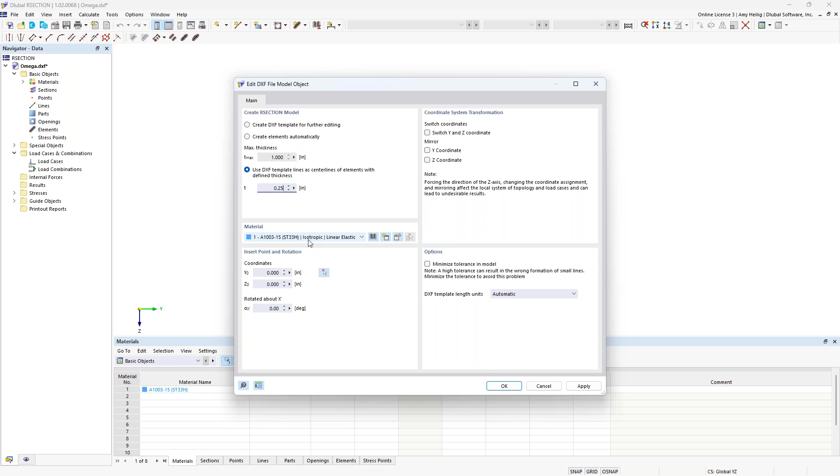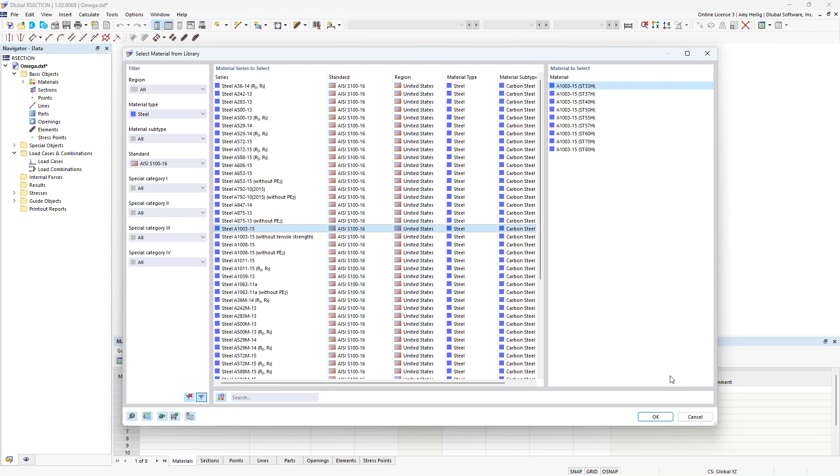We can visit our material library, and over on the left, we have the filters to utilize the steel dropdown and then the AISI S100. So here are all of the available materials for cold-formed steel. And notice that as we click through these different options, there are several subcategories as well. For this particular cross section, we'll go ahead and utilize the A1003-15 and the subcategory here of ST33H. So that material will then be set within this dropdown, and we can go ahead and click OK.

So once the import is done, we actually see everything automatically generated for this custom cross section. Now, I did want to point out that these are completely straight elements. We get a little bit better performance with the finite strip method with cold-formed steel sections when we just model directly these straight elements. It is possible to also model arcs at these corners where the elements join, but just know that the calculation time will be increased because of that. So ideally, it would be best to keep these as straight segments.

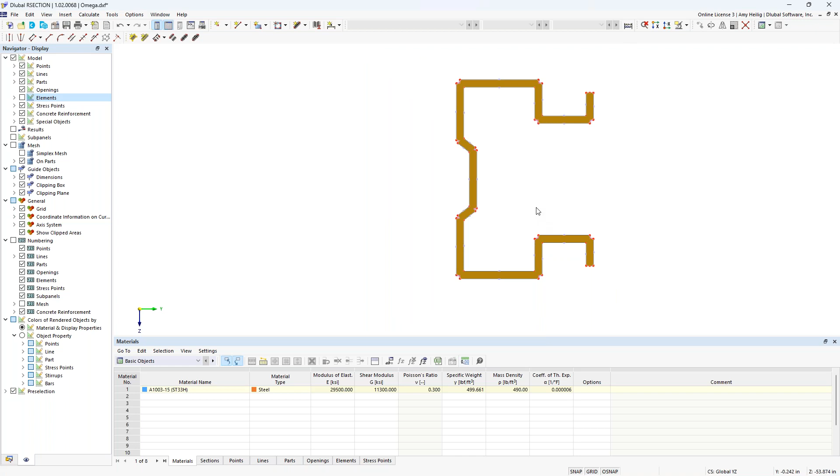Now, looking at the custom cross section here, we have a couple of elements that, again, were automatically generated. We'll start off with what we call the part. And the part is automatically created between the exterior boundary lines here of the cross section. Then on top of that, we have what we call the elements. And each one of these segments here is comprised of an element.

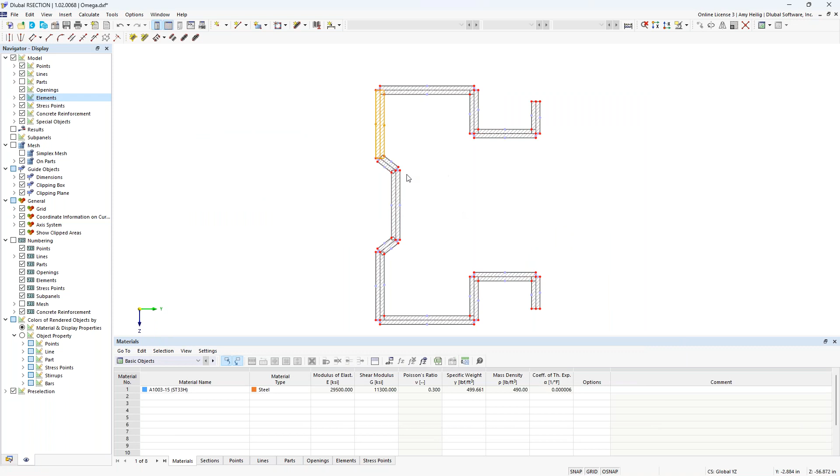We can right click to edit the element. And what you'll see here is that each of these has a particular thickness assigned to it as well as a length. And this information is important for the thin-walled analysis and is required. So we would need both the parts and the elements.

So going back to the navigator here, I'm going to right click on the model name to access the base data. There are two analysis methods. The finite element analysis is set here by default, but this would be more so used for massive cross sections. Instead, we want to modify this to a thin-walled analysis.

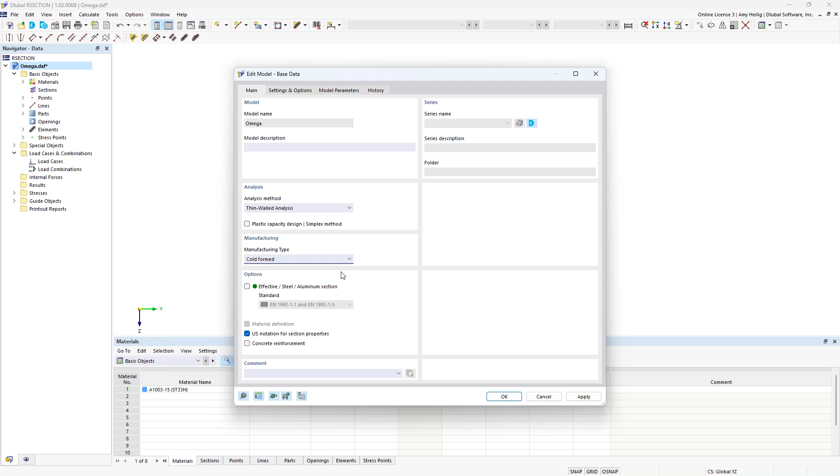Additionally, under the manufacturing type, we can set this to cold form. This will just be helpful once we bring this cross-section into RFEM that this data will already be set. When we click OK, we can simply go to calculate, calculate all, and immediately we'll see here that the cross-section properties are presented to us in table format.

So we have the area, for example, the moment of inertia, the section modulus, and this is the information that needs to be transferred to RFEM in order to understand the cross-section properties here of this section. Additionally, you'll notice the unit stresses are given here based on a 1 kip applied load, for example, for axial forces or maybe a bending moment. We can also view those stresses with the 1 kip per foot applied to this cross-section.

So once we have the cross-section properties, we do want to save this to our computer. In order to integrate in RFEM, we do have to have these saved cross-section properties from the calculation as well. And we will jump over to RFEM. So beginning our cold form steel structure today, when we create a new model, we would give it a model name. The type of model would be set to 3D.

And under this second tab, this is where we have our optional add-ons. So RFEM is the base program, and it's responsible for the modeling, the loading. We can integrate with BIM software, and it can run the full static analysis. So this means deformations, internal forces, support reactions. But if we want to take this a step further to actually carry out the design according to the AISI or the CSA S136, then we need to activate here the steel design add-on.

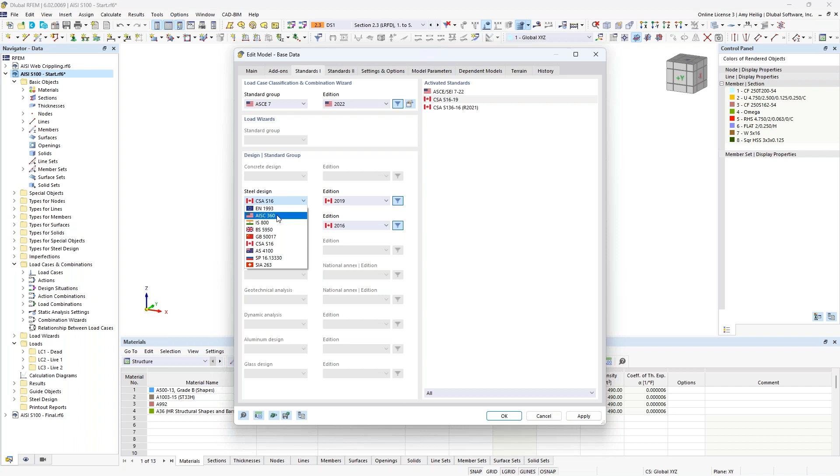So once this information is input, you can see here that for the sake of time, I have gone ahead and modeled our entire structure here. So this is some type of racking system maybe used for automatic storage and retrieval. Now we do have other webinars and tutorials that are dedicated to new users in the program where you can learn how to draw a beam, how to apply supports. So for the sake of time, again, we'll go ahead and just do a quick model review.

So over on the left in the navigator, we have here our various cross sections. If I edit these cross sections so we can take a closer look, we'll see here the cold form steel sections applied to this particular model. So we have some channel sections, additional channel sections with stiffeners, and that custom cross section here was also brought in from RSECTION.

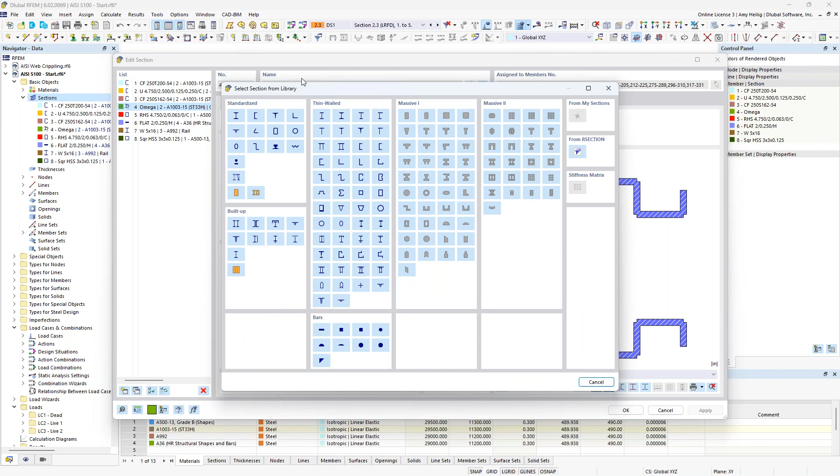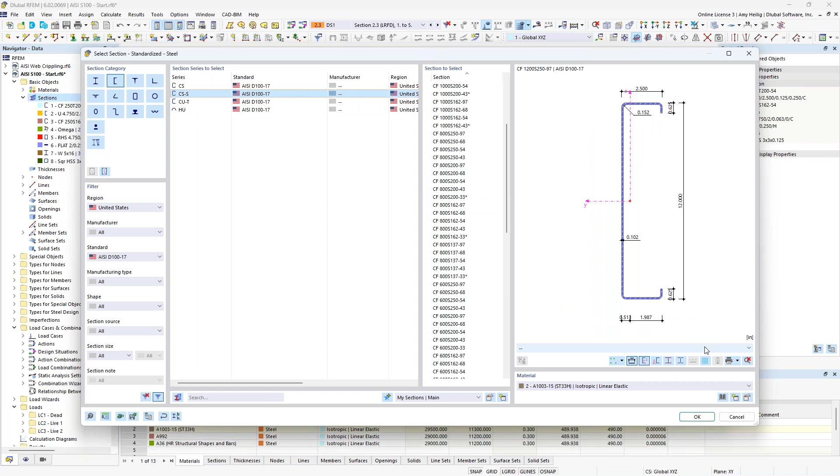When we look at our library database for our cross sections, if you want to choose a standardized section directly from the AISI, for example, if we take a look here at our channels, we'll utilize the filters once again on the left to filter to the United States, as well as the AISI D100-17, and we see the various channel cross sections, including hat cross sections, available to us here, directly from the AISI standard. Alternatively, if you have a parametric section that fits within the criteria listed here under thin-walled, you could simply input the dimensions and the custom cross-section properties will be automatically calculated in RFEM directly.

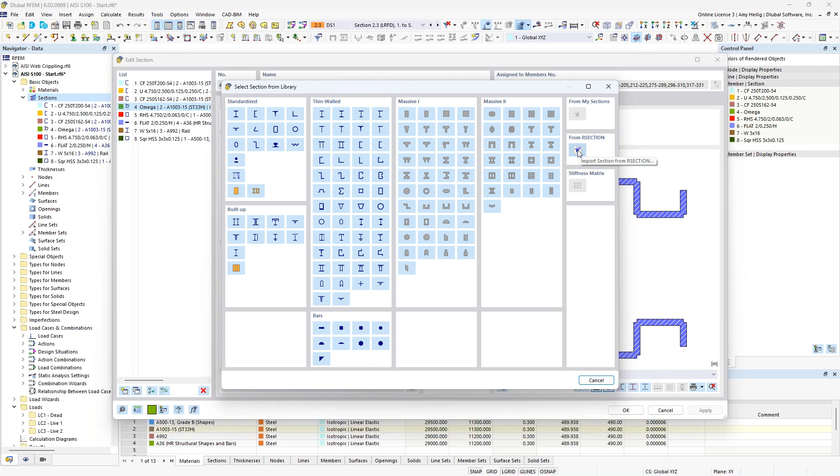And then alternatively, we have the import here from RSECTION, and that's what we utilized for the shape here in the background. I just navigated, once I clicked this option, to that saved file on my computer, and we can bring this in like we would any other member. So in addition to these cross sections, I have also assigned a material. Similar to our section, we can always visit the material database. Over on the left, we filter to steel, to the AISI, and once again, we have access to all of these various materials directly from the standard.

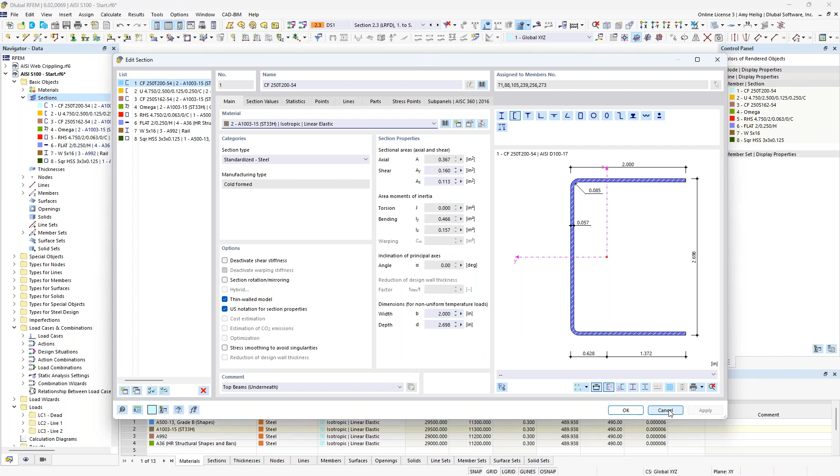So now that we have the cross sections and the materials covered here, we'll also see them within our navigator over on the left. When we take a look at that custom cross-section here for our column, and I'll zoom in, you'll notice that the program has actually rendered this true cross-section for me. And I'll go ahead and create a user-defined visibility here so we can see this in a bit more detail.

So you'll also notice that for these columns, utilizing the custom cross-section, they were actually modeled in segments here. So each one of these is a separate segment. Now, there is possibility in the program to model this as one continuous column and just to keep this as one member and applying intermediate nodes along the length. But alternatively, if we do model this in separate segments, it's entirely possible to create what we call a member set. So we do this by selecting multiple segments.

We can right click, and under the members option, we have here what's called create member set. So that's what you'll notice here over in my navigator, that the program has grouped together these columns. And this will come into play a little bit later on with topics like notional loads, but also the design. Again, wanting to design this as one continuous member rather than those multiple segments.

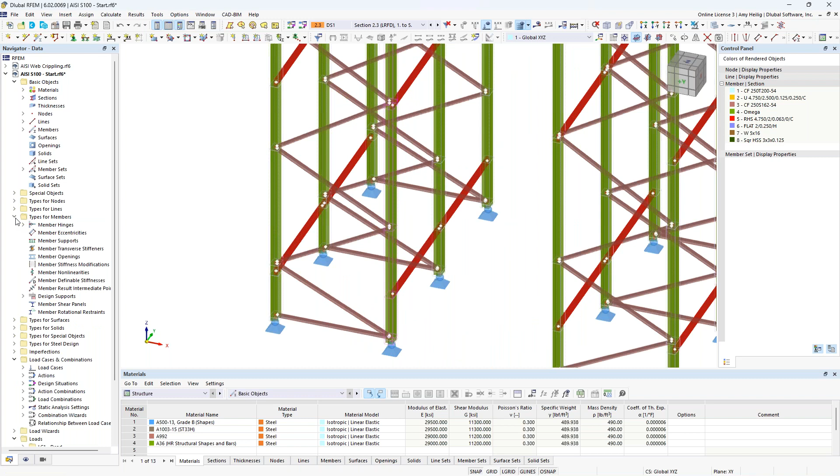You'll also see graphically the member hinges applied with the symbol shown at the member ends. So if we take a look at the types for members, we see here our various member hinges, and the member fixity all depends on how these cross sections or these members are connected to one another. So with cold form steel, it's quite typical to connect them with screws. And I have several different definitions here, just depending on what that connection is.

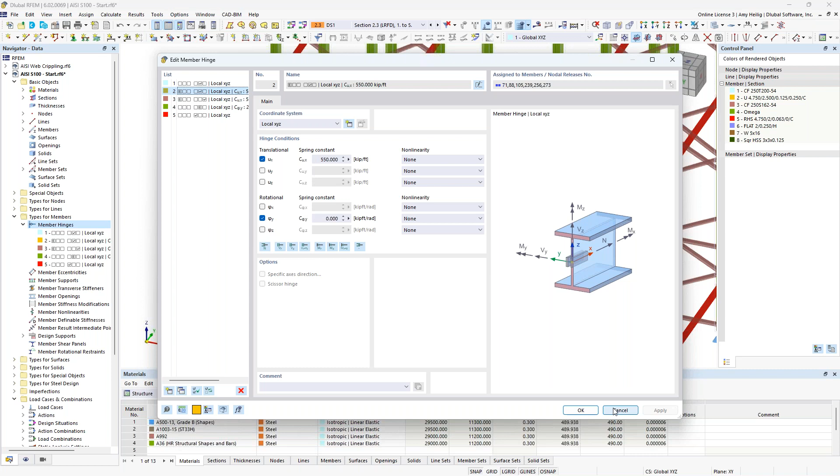So we have our 6 degrees of freedom. These are all based on the local axes of the member itself. You'll notice that for some of these, I've applied a spring constant. So something that's not fully fixed, not fully released, but somewhere in between. So within this model, we can take a look at the different hinges applied. They're probably a little difficult for you guys to see, but as I click through these, they are highlighted in the model depending on which member they are applied to.

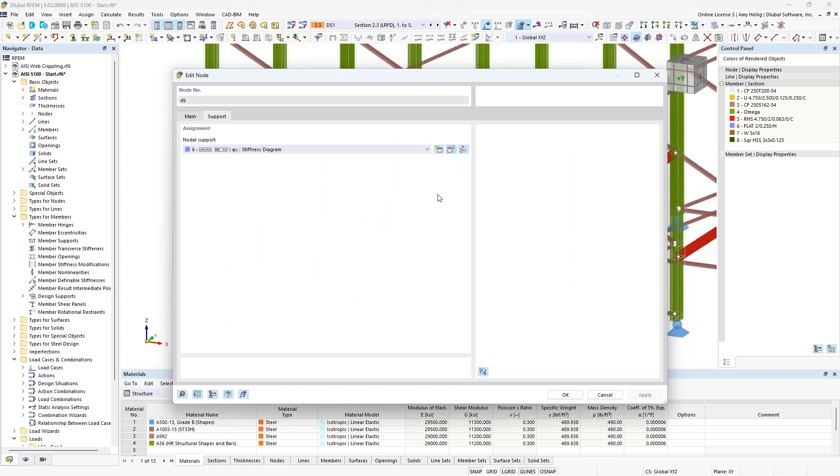And finally, we have our nodal supports down here at the bottom, which were applied just utilizing the tool up here in our toolbar. And these are also a bit special in the sense that initially they just look like standard pin connections, which you'll see under this definition type that we again have 6 degrees of freedom, but these are based on the global axes here, shown here in the background.

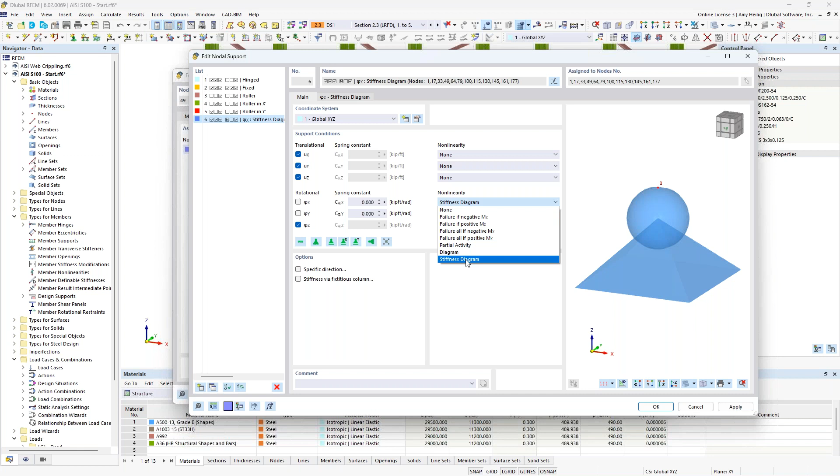So I've restrained the translation for this pin support, including the rotation about the global z-axis, but I've also applied a rotational nonlinearity. So this is within the rotation about the global x-axis, and under the nonlinearity options, I've applied a stiffness diagram. And we now get a new tab here where we can define this information. So you'll notice that I've set this so that the rotational stiffness is dependent on the contact pressure or the downward force for these nodal supports.

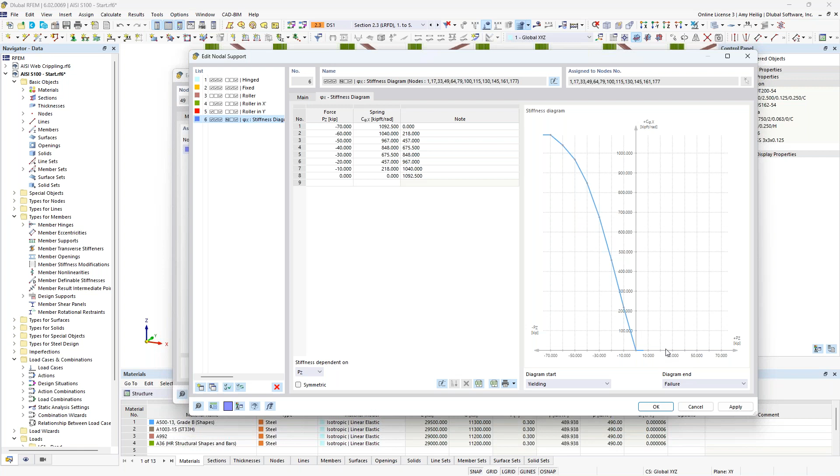So as the contact force increases here, we'll see a greater spring constant, and then in uplift, we'll see that support fully fail for rotation about the global x-axis. So entirely possible here to consider more complex scenarios for our nodal supports as well. So now that we have a basic understanding of the various members within the model as well as our supports, let us move on to loading.

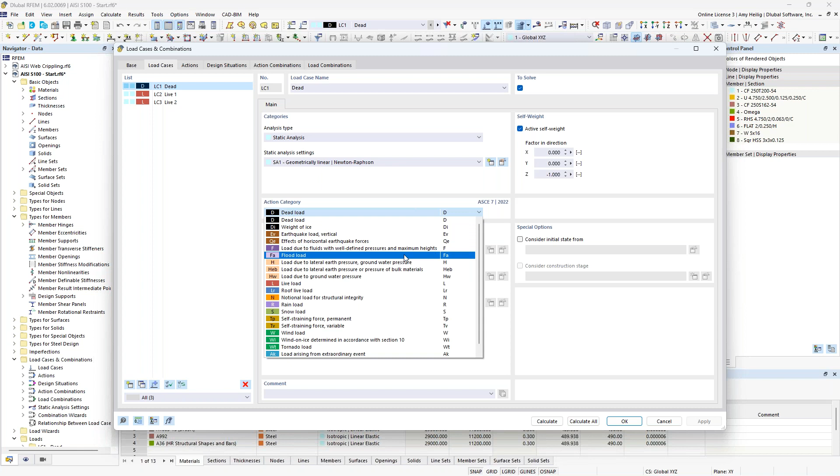So I have here 3 simple load cases that we can access in our load cases and combinations dialog box. So we have the first load case, which is dead load, and you'll notice that self weight is active here, and the action category is also set, which is just dependent on the ASCE 7, because remember back in the base data, this is the standard we're using to generate our load combinations. We can revisit that information here under our base tab, where we'll see the availability to change that standard if we'd like. The second load case is a live load.

So action category set to live, self weight is turned off here. And finally, another simple load case, live load 2 with the action category set to live. So once these load cases are set up, we would need to actually apply the loads to the structure. So we'll begin here with the display of our dead load. So you'll see that I actually didn't apply any additional loads to this load case. We're only accounting for self-weight automatically under the hood for that particular load case.

Now looking at our live load 1, we see here, and I'll turn this into wireframe view, that we have the member load applied here at our beams, which are spanning between the columns. And a member load can be applied up here in the toolbar. But there is something a bit special about this particular member load. If I double click on it here, we'll see that it's just a standard downward uniform load of -0.5 kips per foot, but we have the ability to consider an eccentricity on the loading.

So when I turn this checkbox on, I get the additional tab up here at the top. Now the default behavior for a load is typically applied at the center of gravity or possibly the shear center. But alternatively, we can move that load application up here to the top center point so that perhaps we want to account for some additional torsion within the member for the design, or we can do so directly within the force eccentricity.

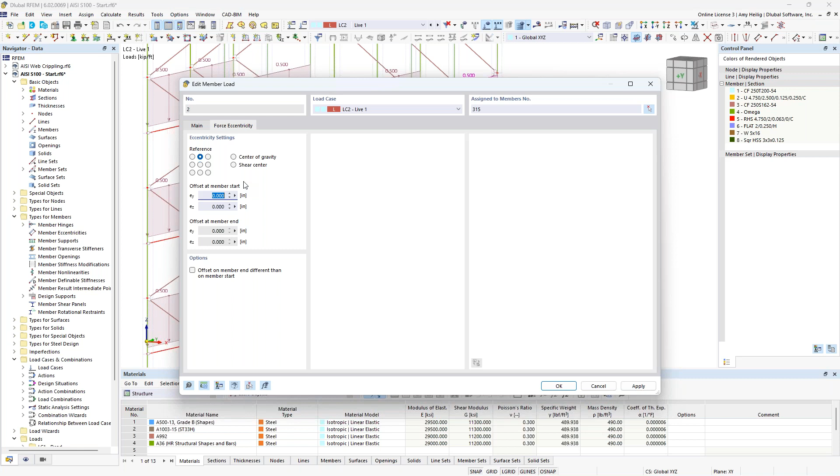So in addition to this first live load, we also have this second live load, and this is also a very simple application with a single nodal load applied up here to our center beam. So this load is just essentially introducing those horizontal forces to the entire racking structure. That nodal load can also be applied up here in our toolbar.

So going back to our load cases and combinations, now that we've generated those load cases, let's take a look at the design situations. So the program has automatically created 2 design situations for us, our LRFD design situation and ASD design situation. Again, these come directly from the ASCE 7, and it's nothing more than just grouping together our factored load combinations for the first design situation and our unfactored load combinations for the second design situation.

We can always click on this little info button here, which will pull that information directly from the standard of what we're referencing. Design situations are absolutely needed when it comes to carrying out the design within the steel design add-on that we activated. So that's why you'll notice that these are by default checked on here for that particular add-on.

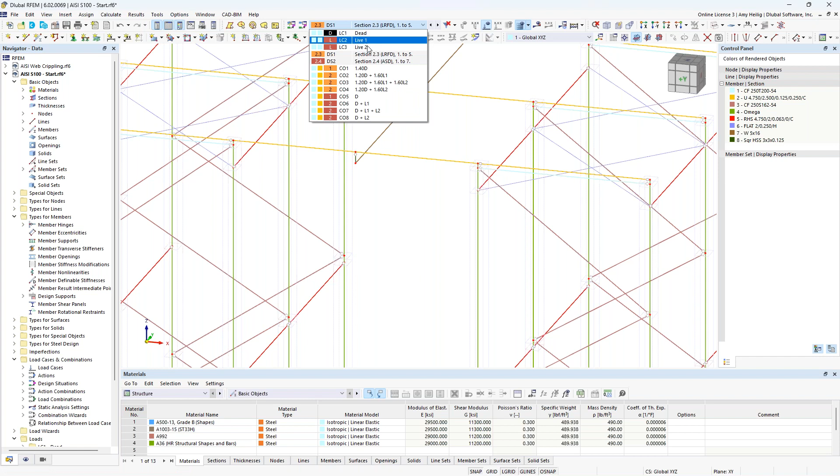So if we look back here at our model and keep in mind under this second live load, particular load case here, we have this horizontal load. So therefore the notional load to create the greatest destabilizing effect should probably likely be in this same direction. So those notional loads all just depend on the load magnitude and direction here for our load cases to consider that destabilizing consideration. So we want to begin by creating these notional loads with what we call imperfections.

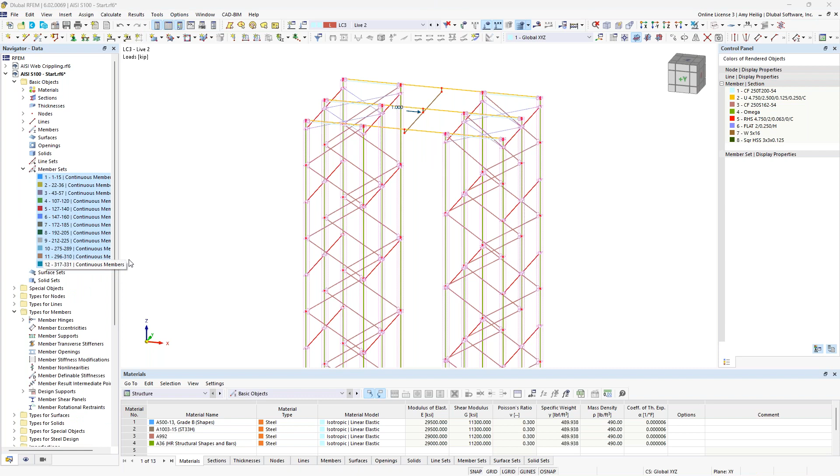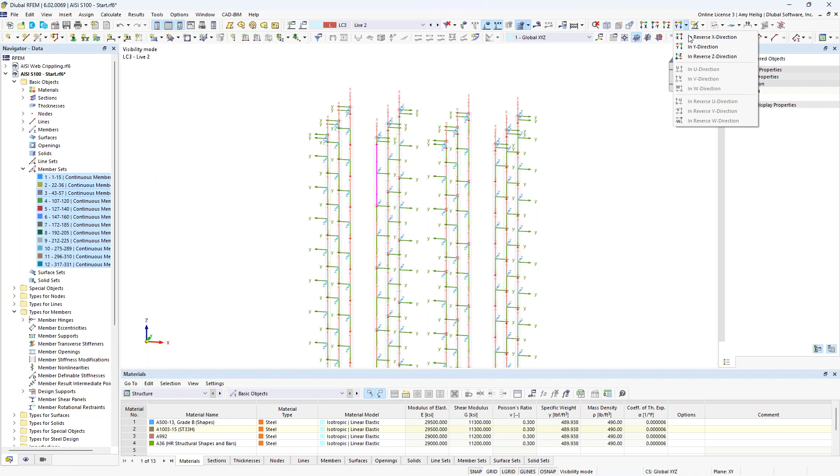So I'll begin by creating a user-defined view here for only my member sets. So we'll go up here to our toolbar and create that user-defined view. I'll go ahead and turn off the hidden objects in the background. Now, additionally, when we create our imperfections or our notional loads, these do depend on the local axis system. So if I right click, I can turn on the local axis system of all of these columns. So we'll take a look at the elevation view here.

Now, the imperfections are going to be available under our navigator here under the imperfections table. So we right click to create a new imperfection case. Now, again, the imperfection directions or the case all depends on which direction you want to apply them in your model.

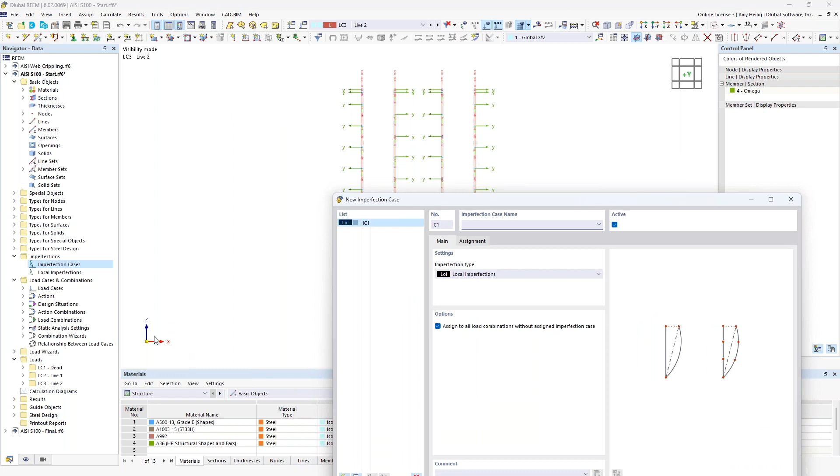For our case today, I'm going to create two simple imperfection cases, one in the global positive X direction and one in the global positive Y direction, or into the page here. Therefore, I need two imperfection cases. So we'll begin with imperfection in the X, and then I simply make a copy of this and I'll create my second case, imperfection in the Y.

Now, the imperfection type within this dropdown will be set to local imperfection. And under the assignment tab, there is the ability to assign specific imperfections or notional loads to specific load cases. Alternatively, though, we can just apply it to all of our load combinations, which is what we'll be doing today.

So now that these imperfection cases are generated, we need to actually apply the notional loads to the structure. So now you'll see here under our imperfections folder, these two imperfection cases. Now we can apply according to each individual member, or we have the ability to apply to a member set. And because these columns are individual segments and I created member sets to group them together as one continuous member, then we will want to right click here to create a new member set imperfection.

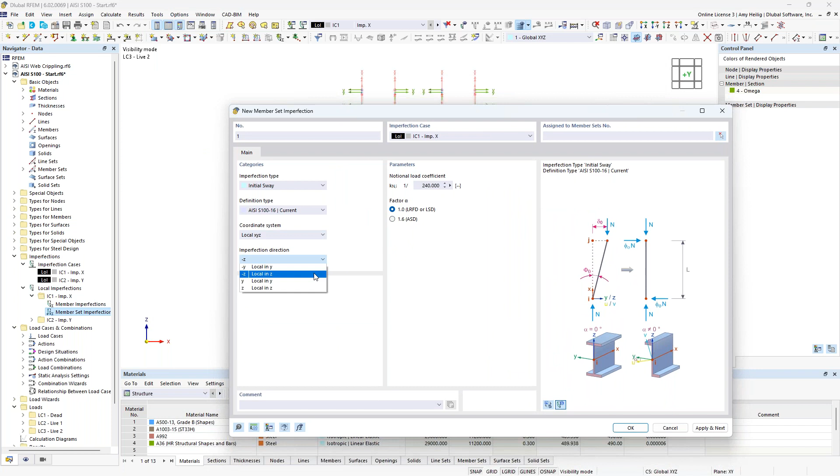The imperfection is applied according to the member's local axes. So for our case today, this first imperfection in the X direction, we want to apply this based on the negative Z axes. And I'm going to select here my member sets in the first row and the third row. And we might be wondering, why are the local axes different here for the different member sets? That's because in rows 1 and 3, I have the members rotated at 90 degrees, and at rows 2 and 4, they're rotated at negative 90 degrees. So inevitably, this affects our local axes orientation, which is why we need to take a two-step approach here for the imperfection direction.

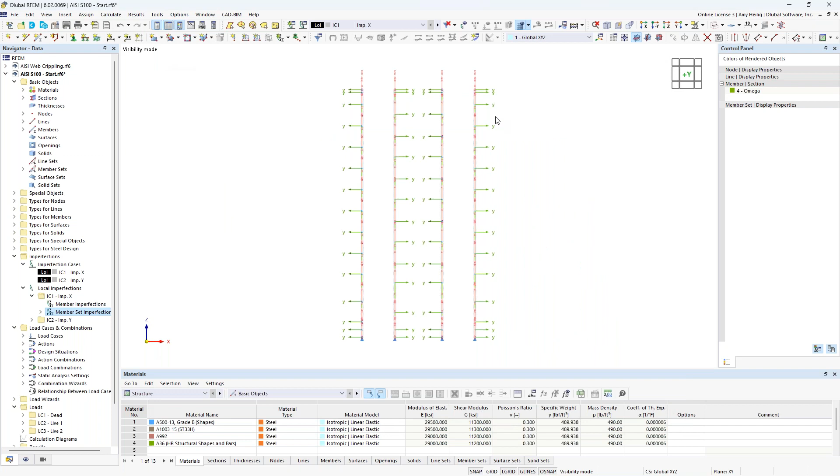So now that I've applied it to those particular member sets, I can click Apply and Next to remain within this dialog box and simply modify my imperfection direction to the positive Y local axes. I'll go ahead and select these graphically as rows 2 and 4. I click OK, and I click OK once again. Now, if we display our notional loads here, or imperfections, we see that column out of plumbness applied, again, referencing the AISI to our member sets or our columns directly.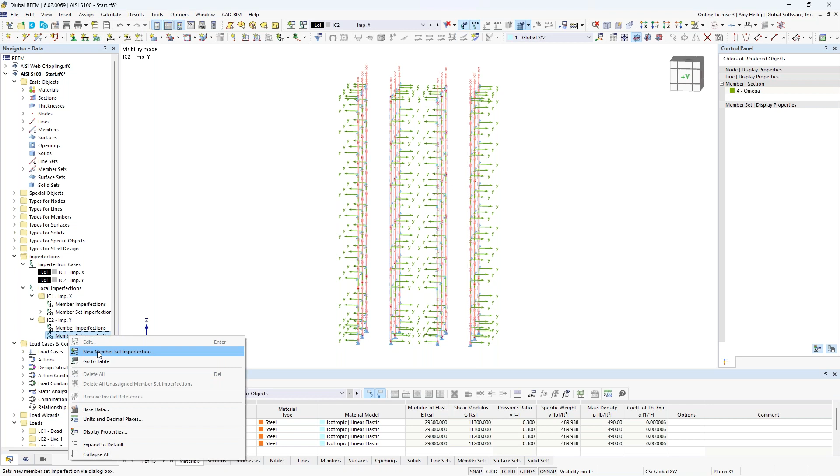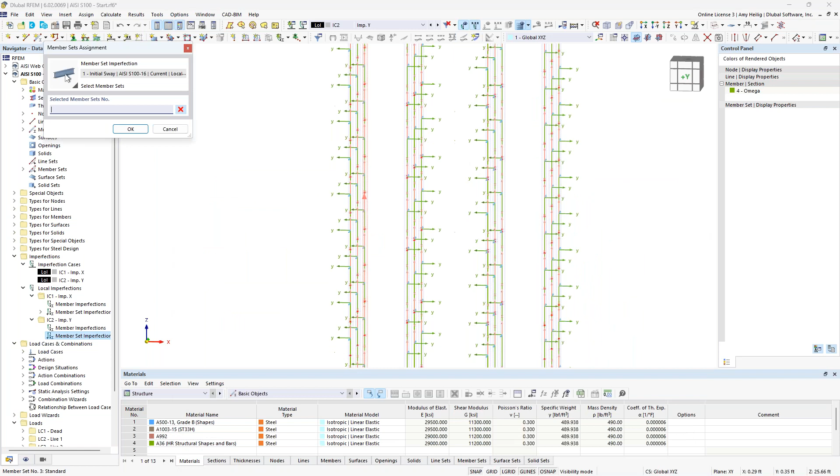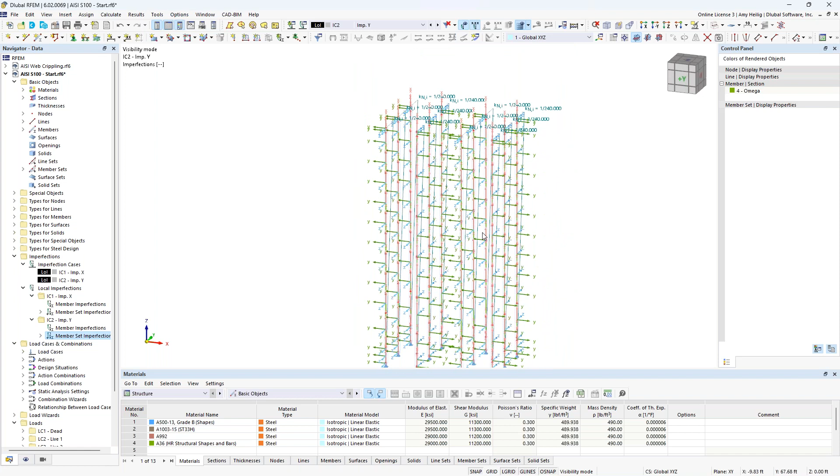We're going to do the exact same approach here for imperfections in the Y direction. So we go back to our navigator to right click to create a new member set imperfection, this time under the imperfection Y case. We'll select the definition type directly as the AISI S100 once again. The imperfection direction this time is going to be in the negative z-axis, and I will zoom in here to select the member sets in the first row and the third row. I click OK, apply and next, and then we simply modify this to the positive local z-axis to select our member sets in rows 2 and 4. I click OK through these dialog boxes, and now we should see this column out of plumbness, and I'll right click here to turn off the local axis system, applied in the global Y direction.

So this is how we can directly account for those imperfections based on the code requirements. Now that we have applied the imperfections in these various cases, we need to combine them into the actual load combinations. So I'll drop down here to my dead load, and this will allow me to access the load cases and combinations dialog box. And under the design situation where we had previously set the second order analysis, you'll notice that we have a checkbox to consider the imperfection cases that is automatically turned on by default.

So therefore, for my factored load combinations, those imperfections will automatically be added in to the existing load cases as well. Now, the problem is that I want to carry out LRFD design today for my cold formed steel structure, but I'm using my ASD design situation for maybe my serviceability or deflection checks.

Therefore, I don't want to consider my imperfections for this second design situation. Well, it's easy enough to create a copy of this existing definition type. And within this copy, I just simply turn off the imperfection cases. So now going back into my main dialog box for my factored load combinations, we'll keep this as definition number 1. But for my unfactored load combinations, we're going to drop down and select the third option here where we

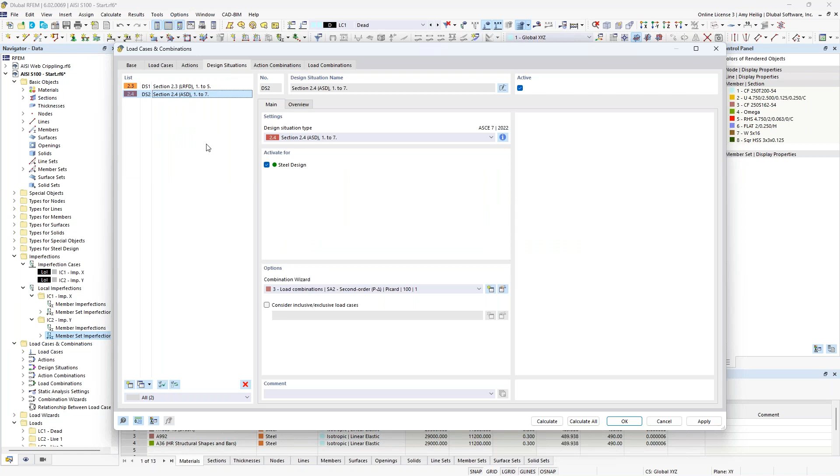The final topic, according to the direct analysis method, is stiffness reduction, and this is given in section C1.1.1.3. We reduce this stiffness to account for inelasticity effects as well as cross-section deformations. So in order to take into consideration the stiffness reduction, we are once again going to go in here to our combination wizard settings. And this option is actually controlled directly here with a new structure modification. So we create a new definition type, and we're going to be applying this to our members. When we turn this on, we get an additional tab here, where under the member modification, we can use our dropdown to create a new member stiffness modification.

Now, very similar to what we saw with our imperfections or our notional loads, we also have the AISI S100 available in this dropdown. So this will reference the code directly and the particular equations given here to iteratively calculate this tau sub B factor that will be applied to the flexural stiffness for each member. And again, this is very similar to what we see within the AISC. Now we also have an additional factor here of 0.9 that's applied to both the flexural and the axial stiffness. Now a difference here from the AISC is that within the AISI, this is 0.9, but within the hot rolled steel standard, this is 0.8. So that is one difference that you'll see here.

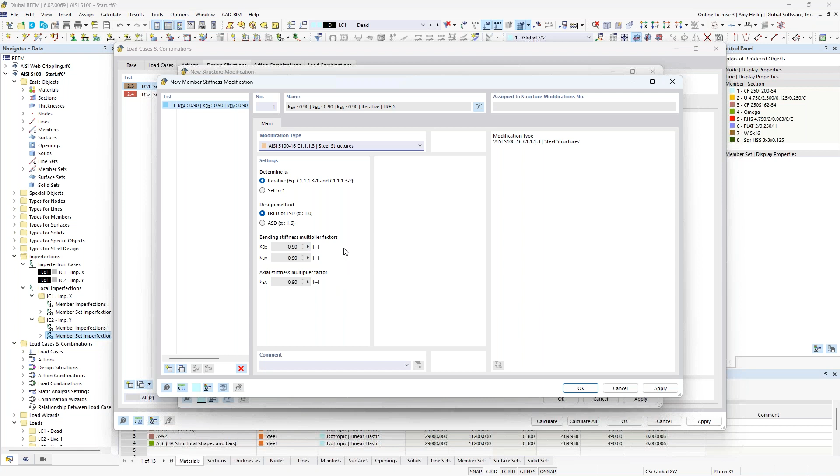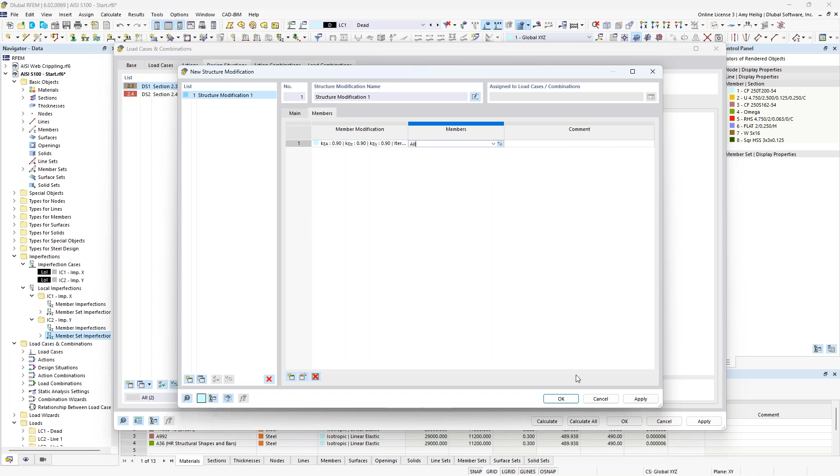Now, the code says to apply this stiffness reduction, once we have defined this, to all members that contribute to the lateral stability. So we certainly could use this option here to graphically select those members, or we could input in the member numbers. Now, alternatively, we can just apply the stiffness reduction to all members. The code goes on to tell us that this is also possible. So if we use our drop-down box for all, we'll now apply those stiffness reductions to all cold-formed steel members within this model. But yet again, I only want to consider this for my strength design, which will be carried out with this LRFD design situation. For my unfactored load combinations, I do not want to reduce the stiffness, so I simply leave this unchecked here.

So once again, we'll go back to the load combinations to check this out in more detail. And sure enough, for each factored load combination, we see the additional setting here to reduce the stiffness. But if we jump down to our unfactored load combinations, this option is turned off.

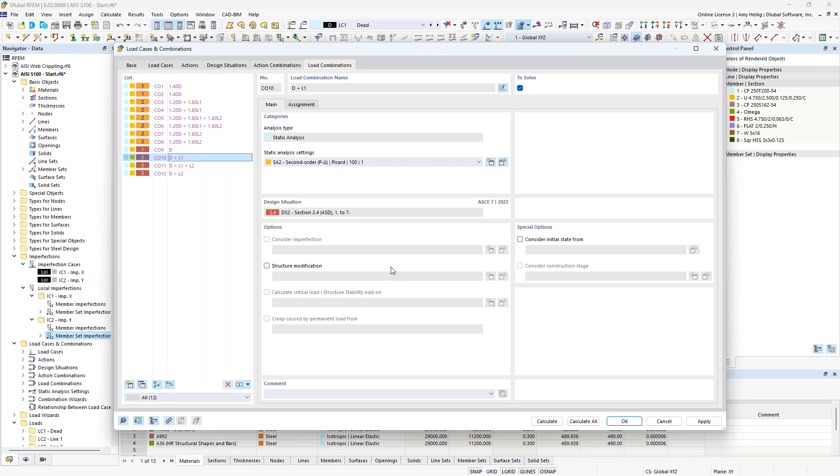Okay, so now that we have fulfilled the direct analysis method requirements, we're technically ready to run the full analysis. But the huge benefit of RFEM 6 is this better integration of these add-ons for the design within the main program. So we'll go ahead and continue on with some of the design input information specific to the AISI to carry out that workflow. For this, I'm going to go back to the PowerPoint here because I do want to talk in a bit more detail about the member buckling behavior. Very important topic when we're talking about these very thin-walled cross sections.

So we know that there are failure buckling modes that are typically caused by compressive stresses on our members. And this is usually seen when we have a bending moment or an axial force. Well, when we're talking about cold-formed steel, there are 3 buckling modes that we typically consider. The first is going to be local buckling. So this is essentially where the elements bend with no translation at fold lines. And what I mean by elements, if you remember back to our custom cross section here, each one of these segments is a particular element. Well, what we see also with this failure mode is that we have a short half wavelength. And what I mean by wavelength is this is the length at which the buckling shape repeats along the full member length.

Now, additionally, we also have global buckling to consider, and this is lateral bending of the entire member, and we typically think of this with flexural torsional, or lateral torsional buckling. Now for this, we'll see one long half wavelength, which is always dependent on the unbraced lengths for these particular buckling modes.

And finally, a bit more unique to cold formed steel is distortional buckling. So this is more or less a combination of local and global failures, where we have some translation at the fold lines, but also the half wavelength is somewhere between what we see for local versus global.

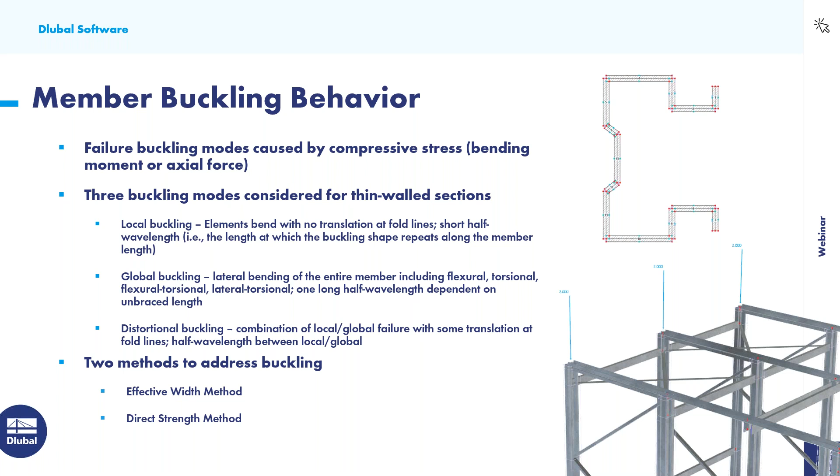Now, there are 2 methods throughout the AISI to address buckling. The first is the effective width method, and the second is the direct strength method. So going to our next slide here, let us talk a little bit more about the effective width method versus the direct strength method, and maybe some advantages here that we have.

So the effective width method essentially will consider each individual element here. So again, these elements are what comprise our cross section. And an effective section calculation is required for each one of these elements. And we really don't have any interaction between these elements for the overall member or section behavior.

Now, alternatively, when we turn to the direct strength method, and this is going to be the method that RFEM is going to utilize, this has definitely some advantages in the fact that no effective width calculation is required for each one of these individual elements. There's no iterations required, but rather the gross cross-sectional properties are used for the entire section.

We also have the interaction of all elements for all stability limit states because we're not considering, again, these individual elements, but rather the full cross-section itself. We also have compatibility and equilibrium maintained at the element junctures. So where these elements connect is specific to the direct strength method, whereas with the effective width method, these are more or less not accounted for.

Direct strength method is also applicable to a broad range of sections. We might see more limitations when we talk about the effective width method and which cross sections it can be applied to. Direct strength method, we really do have a lot more freedom here to apply this to pretty much any custom cross section as well.

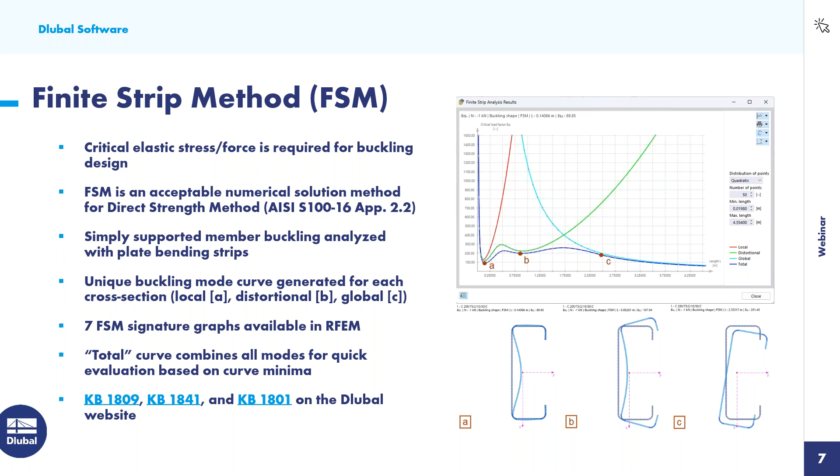Okay, so what we will do now is to go back to the RFEM model, and I'm going to revisit the cross sections here. So looking at the various cross sections, we'll immediately jump down to that custom cross section, our Omega section in particular. If we use our drop down over on the right, here are those 7 unique graphs that I just mentioned for the finite strip method, and these are all based on the applied unit load.

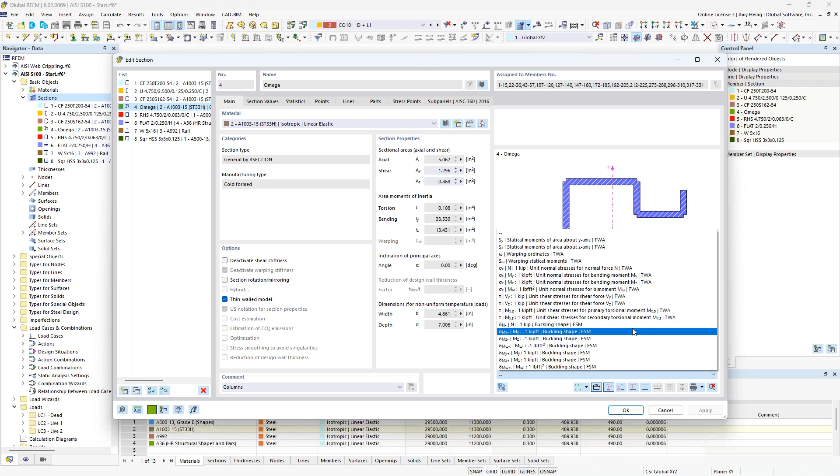So if we take a look at 1 kip axial force, what we will see is that finite strip method plot, again referencing that PowerPoint, and this currently is showing the total curve. But additionally, what we can do here is to plot the local curve by selecting it within this dropdown, and we see that appear over here on the left-hand side with the red curve. We can also display the distortional curve, and finally, we can display the global curve.

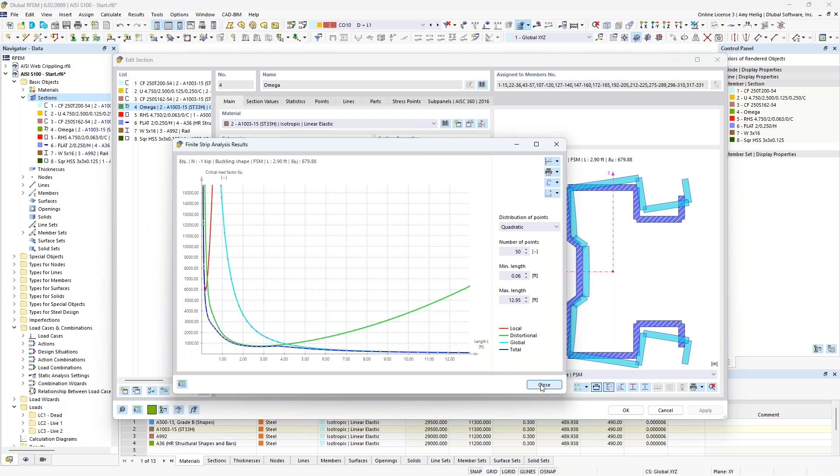And ultimately, that total curve is going to consider all 3 of these, again, for just a quick evaluation here based on the curve minima along the length. So this is what's happening underneath the hood for every single cross section, even if it's a custom cross section. So now that we have a better understanding of the direct strength method and finite strip method, we'll go ahead and take a look at global buckling now in a bit more detail with effective length definition.

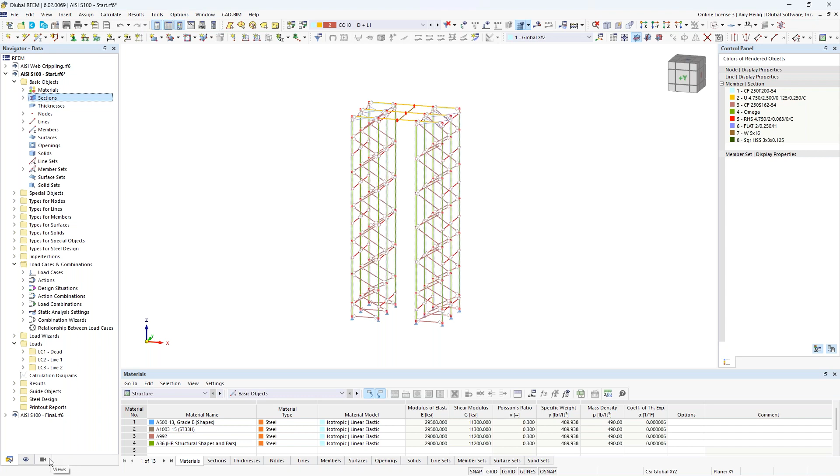So when we design our members, we need to input information such as unbraced lengths. We'll begin here with activating only my rectangular HSS section. So let me go ahead and show the rendered view of this so you can understand exactly where these cross sections are. So these rectangular sections are spanning in between my columns. And we'll begin with the effective length definition for these particular members.

So we highlight them all, we double click, and what you'll notice is that the design properties here is turned off. This is telling the program that I'm not interested in carrying out the actual design according to AISI. Rather, I only want to carry out the analysis. When we turn on the design properties, this is going to reference the Steel Design add-on, and we get additional tabs here up at the top. So this is all information that is specific only for the design.

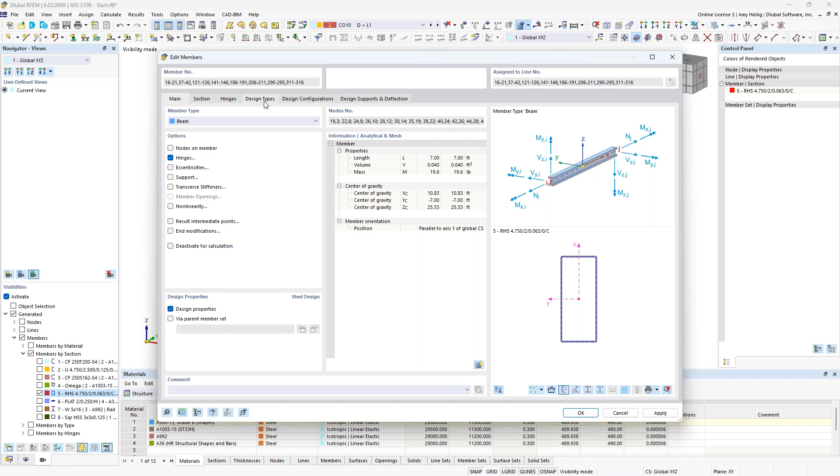Under the design types, we have here the effective length definition. So let us go ahead and access a new effective length definition. And you'll see here I can modify my view within this dialog box so we can see those HSS members spanning between the columns. We immediately want to change this to the effective length definition according to AISI S100 for these rectangular hollow sections.

Then you'll notice that for global buckling, we have here 4 considerations: flexural buckling, strong and weak axis, torsional buckling, and lateral torsional buckling. We also have the ability here to determine the elastic critical stress according to the finite strip method or according to chapter E2 F2.1. So this is a really important topic, so I'm going to jump back again to the PowerPoint here to explain in a little bit more detail.

So you'll notice within this dialog box, as I just showed you, that we have 2 options here to determine the elastic critical stress. The first option being the finite strip method or the numerical method. And this is going to be applied then for local, distortional and global elastic buckling failures. But it should be known that if we do choose the finite strip method, flexural and torsional stability failure modes are always grouped together for the global buckling. And this is regardless if we uncheck one of these options.

So if I am thinking, okay, my member is fully restrained against torsional buckling, but I'm still concerned with flexural buckling, so I fully uncheck this option, the program doesn't care. It still sees these grouped together because we're referencing the finite strip method graph. So this is purely a limitation of how these graphs are created, that flexural and torsional buckling are always grouped together.

Now, alternatively, if we leave these checked, but we have varying effective lengths or unbraced lengths for flexural versus torsional, again, because these are grouped together, we are always going to take the longest effective length. So if we would like to set a smaller length for torsional buckling versus flexural, the program just groups them together for those particular global stability checks and will reference the longest effective length. So just keep that in mind with the finite strip method with the global buckling.

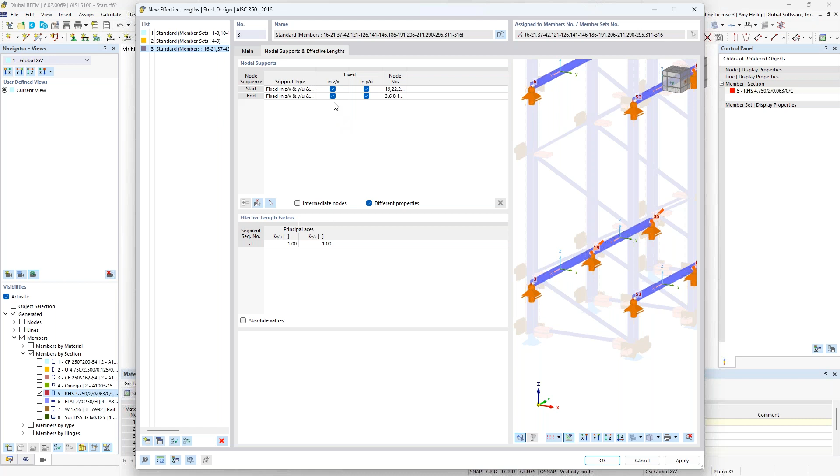Under this second tab, this is where we apply our nodal supports, and you can see the program automatically will apply these at the member ends, and we will be fixed for flexural buckling in the strong axis as well as the weak axis. So that effective length, KL, will automatically be calculated for all of these members shown here. So once we are done with the effective length input, we also have the ability to apply a local section reduction. Just keep this in mind that this is only for the tension design according to the AISI. We do not carry out any equations at this point in time for cold form steel considering holes. So everything is considered without holes.

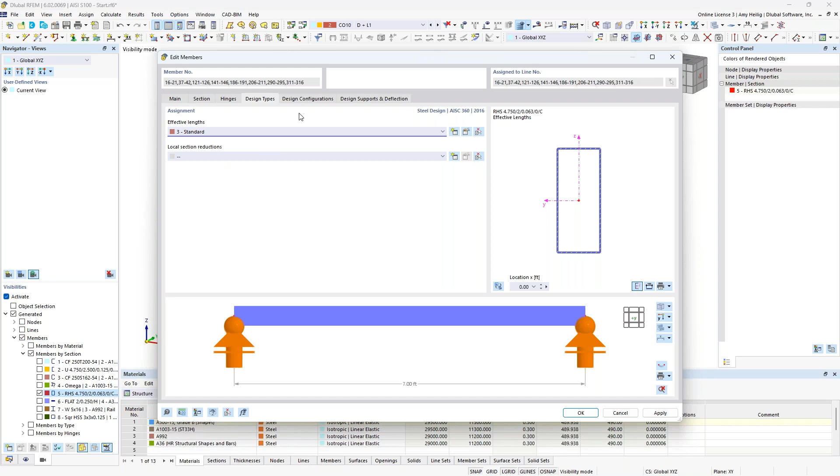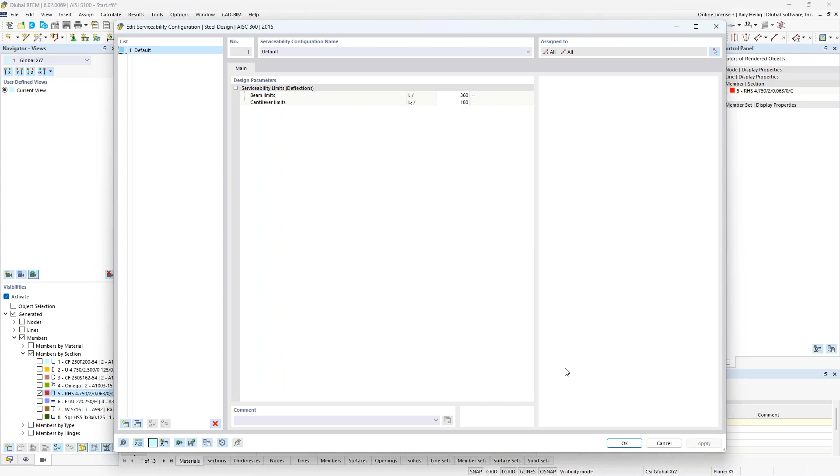Under the design configuration, we have here our strength configuration. So we take a look at the default settings here, just some various settings that we have put in the code references directly for alternative equations. So you could certainly take a look at here and make those modifications if you'd like. Under serviceability, this is just simply where we set our limiting deflection ratio for our deflection checks. So for simply supported members, we will reference this L/360, and for cantilevers, we'll reference L/180, but of course you can make modifications to this design ratio here.

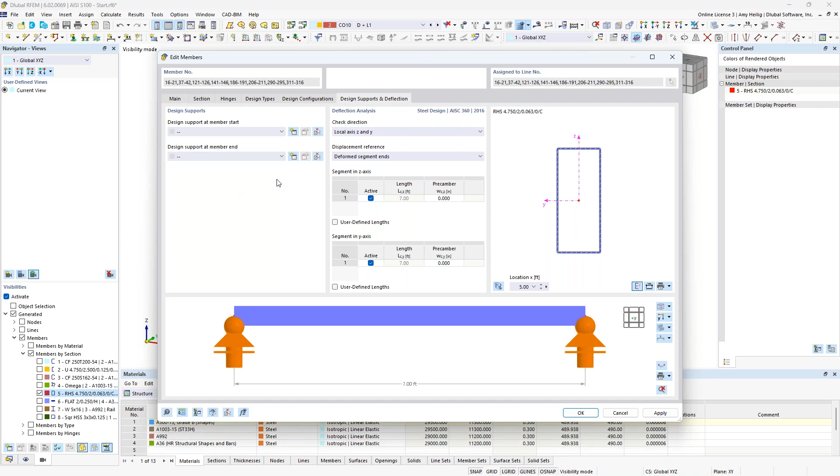And finally, we have the design supports and deflection. If I do absolutely nothing within this dialog box, the program automatically assumes that it's supported at either end. Therefore, we're going to reference the L/360 limiting deflection ratio. For our case today, we'll go ahead and leave this as default and not make any further modifications here. So now that this information is complete for these rectangular sections, I'll go ahead and cancel out my visibility here.

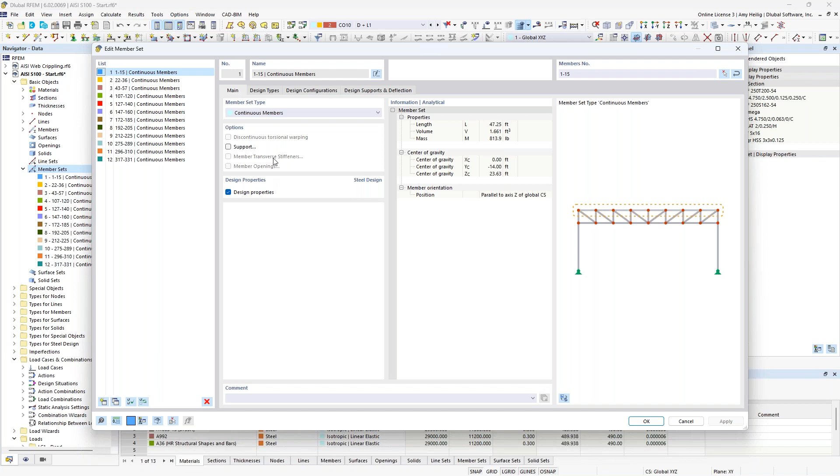I also have carried out the same workflow for my member sets. So remember, I want to design these columns as one continuous member. So rather than going into the individual member settings, we can come in here to our member sets. And what you'll notice within this dialog box is that this also has a design properties checkbox. So when this is turned on, we have some additional settings up here at the top within these tabs that look identical to what we just covered.

Now, because this column is certainly much more complex, I went ahead and defined the effective length already here. So you can see that I have flexural, torsional, lateral torsional buckling all considered. I'll go ahead and change around my view here so we can see exactly which members we are looking at. I am referencing the different properties here because I have some different unbraced lengths for torsional buckling versus flexural buckling.

Now we have the ability to detect these intermediate nodes along the entire length, and notice that there are 4 degrees of freedom. This just all affects the effective length definition here for flexural buckling in the strong axis, flexural buckling in the weak axis, torsional buckling, and lateral torsional buckling. So depending on our particular connection and what members are framing in here, we can set these accordingly.

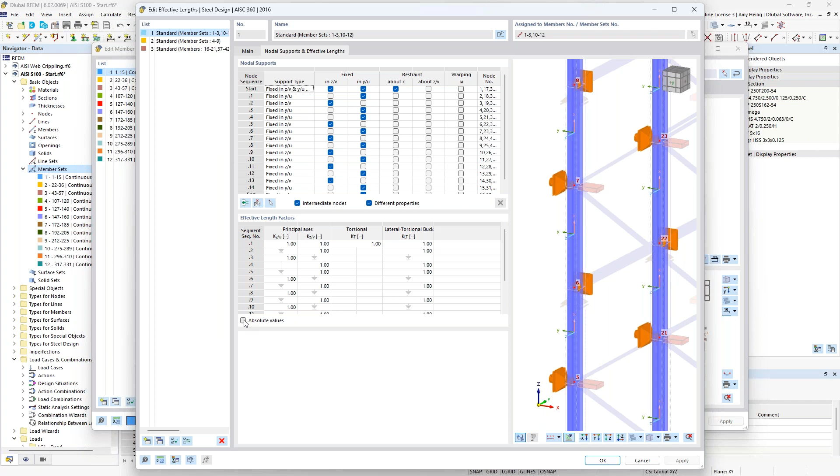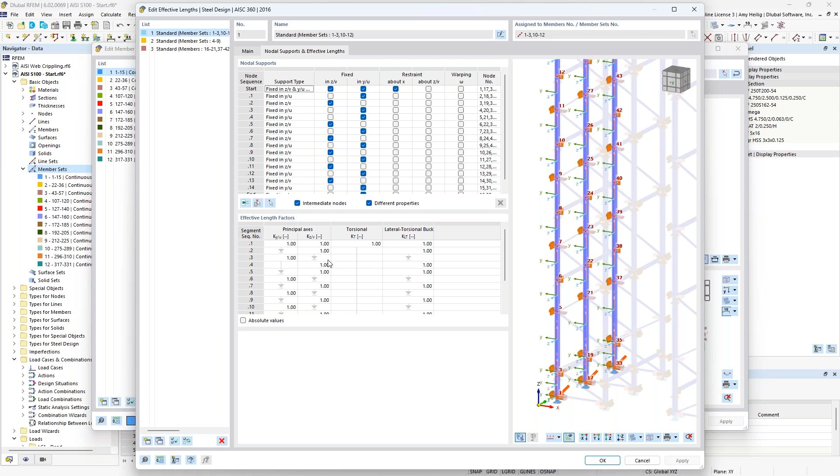And alternatively, if you have absolutely no interest in inserting in all of these intermediate supports, you can check on the absolute values here and directly input KL for each of these failure modes. And the downside to this is that if the model has any changes, maybe nodal location, we modify these slightly. If we use these options up at the top, everything will be automatically updated for our unbraced lengths. Alternatively, if we override these, we would need to come in and manually modify them, but that's certainly an option that you can take advantage of.

Also, under the design supports and deflection, you can see here that I have assigned specific design supports depending if the member is supported in the strong or weak axis direction. And these are applied all along the member length because I really don't want to reference the full column height for my limiting deflection ratio, but rather I want to reference the L, or the length in between these intermediate supports. And we do so with the design supports. And notice that all of these intermediate nodes were directly detected within the program.

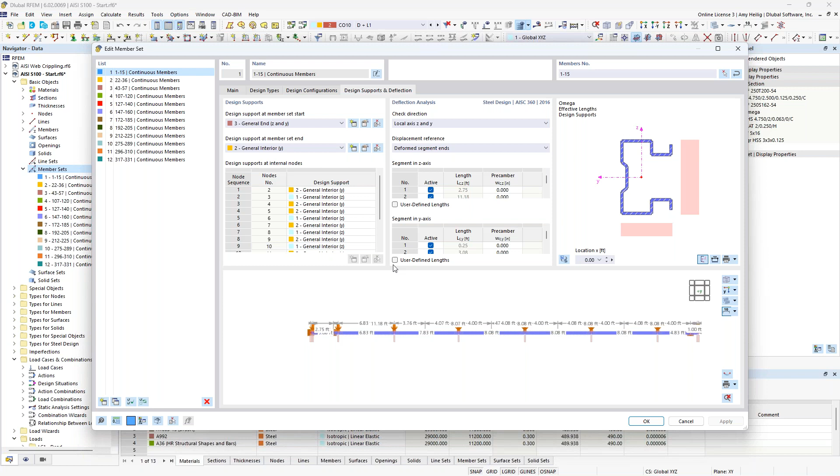Okay, so now that we have this information defined, such as unbraced lengths, we'll go ahead and exit out back to the program. And we want to jump down here to the steel design add-on. And you'll notice under this first tab, we have our design situation. So I had mentioned that if we carry out the design, we have to use these design situations. And the reason why is we see our first LRFD design situation that we are going to relate in the second drop down here to the strength limit state according to LRFD design. I'm using my second design situation, ASD, and I'm relating this to serviceability.

Now, alternatively, if we were carrying out ASD design, then maybe we would turn off altogether LRFD. We would set our strength limit state according to ASD for our ASD design situation. We can make an additional copy of this design situation for serviceability as well, or we could create our own custom design situation for serviceability. Again, for our example today, we'll go ahead and carry out LRFD design.

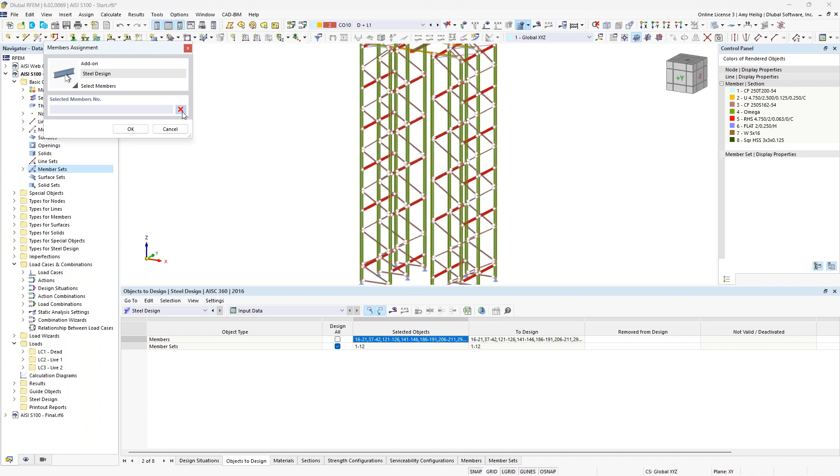Under the second tab are the objects to design. Now you'll notice that defaults to designing all members and all member sets, but we have many members that are given to us over here in this column in red, and that's because they don't have an effective length defined. So the program won't be able to design them, of course. So rather than designing all members, let us go ahead and graphically select here by clearing out this entry, and I'll turn on only my HSS sections so that I can graphically select these. The member numbers are automatically input here. And now we're ready to carry out the design for this simple example only for my rectangular sections, but also for all of those member sets or each of those columns.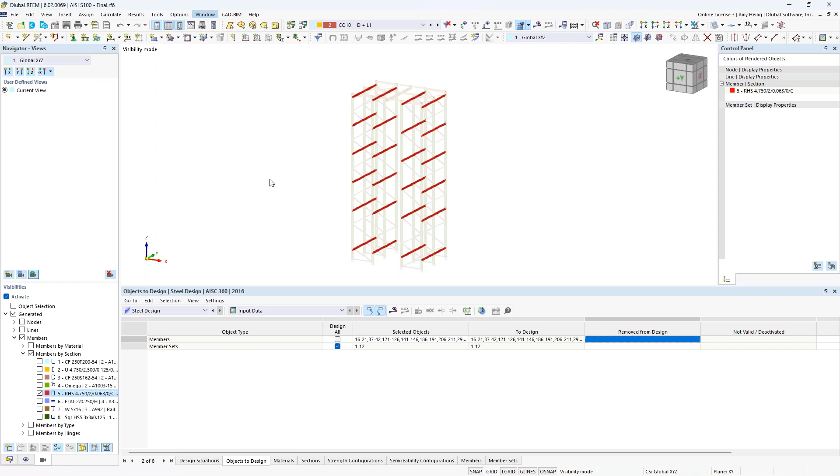So we go to calculate all. Now, because of the finite strip method, remember for all of these individual cross sections, the calculation time does take a few minutes. So rather than waiting for that, we will jump to an already saved model here with our results. So once the calculation is done, we are currently looking at the steel design add-on, but we now have available to us the design ratios on the members. And we could view these design ratios in the table format here for each individual member. And you'll notice that as I click within this table, the program will automatically sync here in the graphical view to show me exactly which particular member I'm looking at. That red arrow is showing me for that particular check exactly what's controlling.

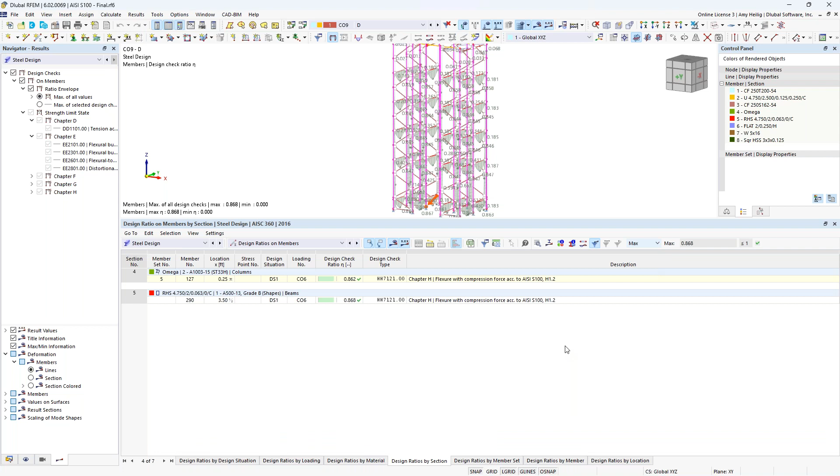But maybe we look at the design ratios by the cross section because I've only designed 2 cross sections for today. We have here our custom cross section from RSECTION that we brought into the program, as well as our rectangular hollow section here. And you'll notice that we are checking every single chapter here for our strength design, as well as serviceability, referencing each chapter. Now, if you're only interested in the max design ratio, we could always use our filter here to select the max. And now we see just the controlling design ratio for this particular cross section.

And for these individual checks for each chapter, we can access what we call the design check details. So this is new within RFEM 6, that for all of these code calculations, you'll notice here that we list the formulas line by line. We have all references to the AISI standard, and we have all the variables also listed out here, and ultimately how we are calculating this design ratio. So trying to be as transparent with this information as possible so that you can follow along with your own hand calculations to ensure that you agree with the program's output.

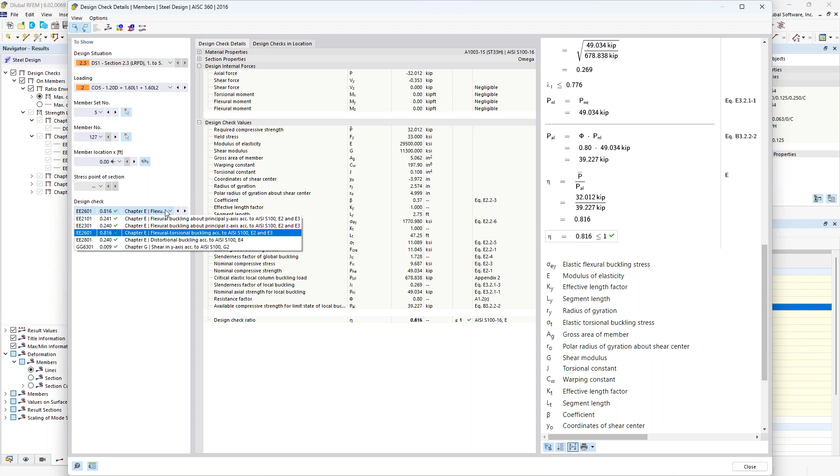We can print this to our printout report. What's nice is that if we do this and we make any model changes, we rerun the design, the picture of these calculations will automatically update as well. We can jump down to any different particular check here to view the various formulas for chapter E, for example. Also within this dialog box, we can access what's called the diagram in section.

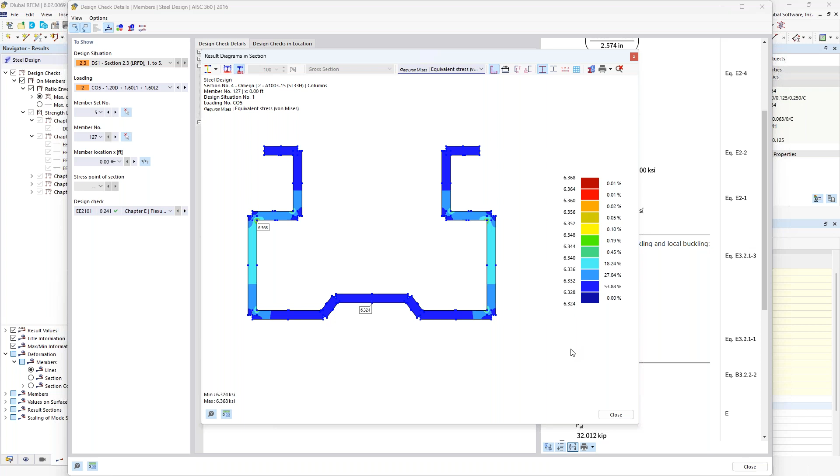So under my drop-down box, we see our custom cross-section here where we can view the stresses. And within this additional drop-down box, we can view the total normal stresses, or we can view the total shear stresses, or perhaps we're interested in the von Mises stresses. And this is all for load combination number 5 at the X location of 0. So just trying to give you a little bit more information here in terms of the stress output for these cross sections.

So now that we have viewed this information in table format, notice that over on the left under the steel design, we can turn on and off the various design ratios shown graphically here. Currently, we're viewing just the overall max ratio envelope, but you'll notice under these options, we can individually select the different checks.

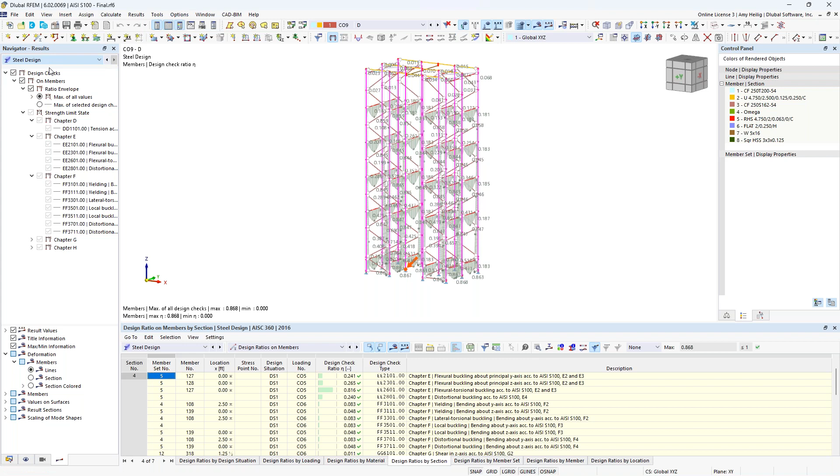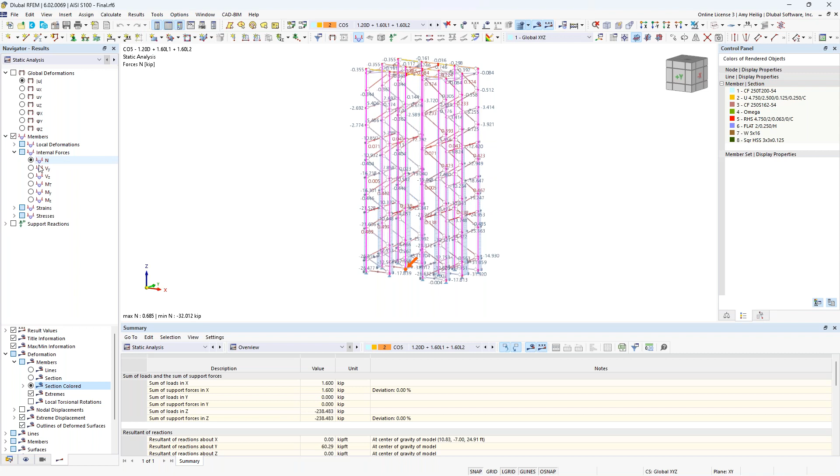So backing up a step, if we also use our drop down here to take a look at the static analysis. So we're currently viewing any one of these load combinations, and this was the static analysis carried out directly within RFEM. So we can view the global deformations, for example, and perhaps I change my deformation display to colored cross sections. We can also view the member internal forces. So we can view the axial forces or the shear forces, bending moments.

If we zoom in here, we can right click on one of these members and access what we call the results diagram. And you can do so with individual members or groups of members. This will allow you to turn on these internal forces or deflections and view in a bit more detail what's going on along the member length.

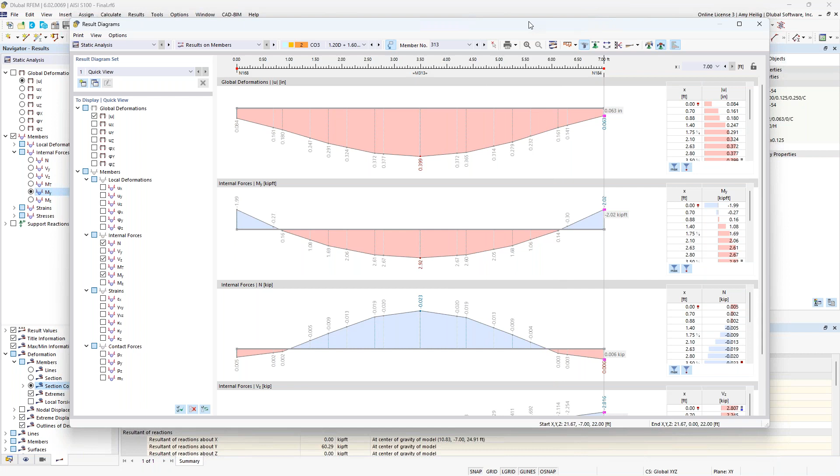We can switch to a different load combination here. We can add this information to the printout report. We can smooth, we can average out these forces. So quite a bit of information here that we otherwise wouldn't be able to do graphically. And you can slide this over to your second monitor and work concurrently in the program.

So in addition to the graphical output, we also have our table output for the static analysis, where we can view the results by member, such as the internal forces. We can export this information to Microsoft Excel with the click of a button up here for further sorting capabilities. So hopefully this just gives us a nice overview then of the full analysis and design workflow for these cold-formed steel sections according to the AISI. As we know, identical workflow for the CSA S136.

So in the final few minutes here, I do want to turn to a topic that is maybe a little bit more unique for an FEA program. And this is web crippling design. So typically in a lot of FEA programs, we just simply can't account for these additional checks. But within RFEM, we actually have integrated these. So we can carry out the design of web crippling according to section G5, and this is web crippling without holes, as well as section H3, which is combined bending and web crippling.

Now, this is only applicable for sections that are referenced directly within the standard, in particular table G5-1 through 4. And those sections are listed here. So any other cross section outside of this list, we won't be able to check web crippling, so you would need to manually take that into consideration. Another requirement is that the member must have 0 rotation set. So we can't rotate this member 90 degrees or 180 degrees. We need to leave it at 0 if we do want to carry out these additional checks.

And finally, the last requirement is that we have to apply what we call the steel design supports. And this will allow us to directly reference these tables from G5 in order to carry out the full web crippling calculations. Now, we've already talked about design supports within our example model today that we use for deflection. So what we'll do is to go back to the RFEM model in the last couple of minutes, and I'll pull open this simple single beam element here.

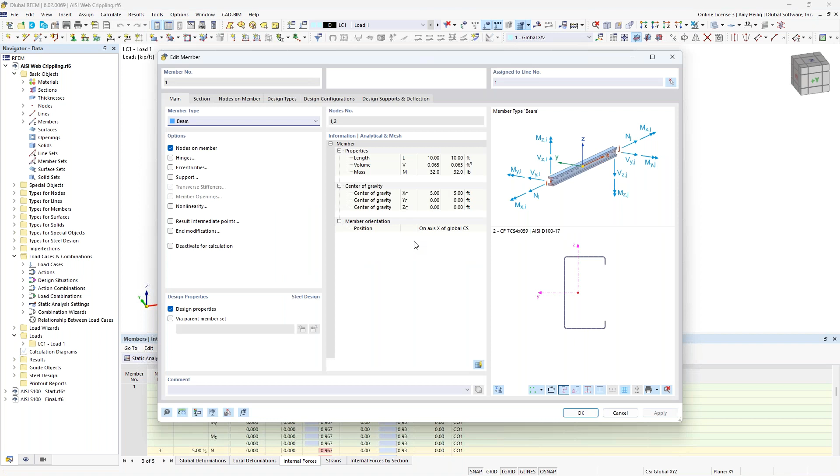And this cold-formed steel section, if we zoom in here, is just a typical channel section with some stiffeners added at the end. And this was from the AISI database within RFEM. And we have a uniform load here at 0.22 kips per foot along the full member length. Well, if I double click on this section, everything is as we've already learned from our previous example, except for let's take a look at the design supports. So you'll see here that I have already defined supports at the 2 ends as well as the interior with that automatically detected node, but we do need to create the design support definitions.

So you can see the first one, I have labeled this as the end support, and the type in this dropdown is set to steel. If we have this set to general, we'll only consider these design supports for deflection. But when we have it set to steel, this will allow us to further carry out not only the deflection checks, but also the web crippling.

So you'll see that I do need to give it a support width. So we enter in the support width. For my end support, I set this at 3 inches. We need to tell the program if it's an end support, if it has an overhang length, and also is that support fastened to the member. And this information is all important to reference to chapter G5 from the AISI. Without it, we wouldn't know what variables such as safety factors, resistance factors, coefficients to reference without directly inputting it in here.

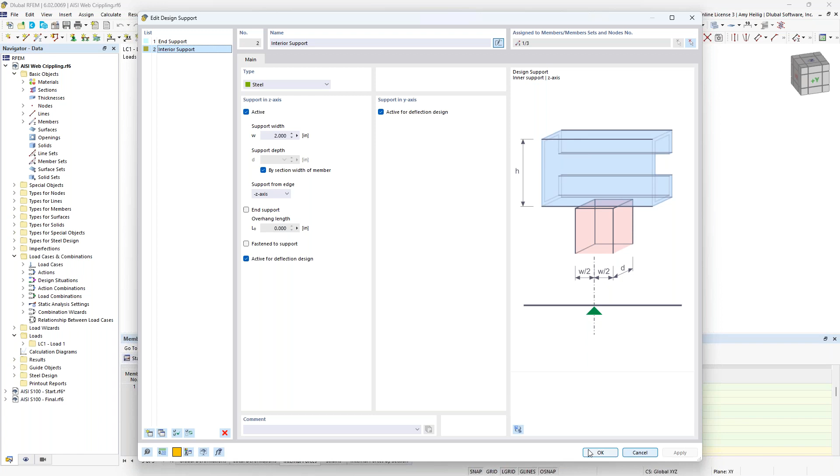Now I also have a second definition for my interior support. So if these supports vary, that's no problem. We just create a second definition type here. The type is set to steel. My support width was decreased to 2 inches. It's not an end support, and maybe it's not fastened to the member. So once we have the definition set, then we just simply use our drop-down box to assign them to the nodes along the length of the member.

So once this is input, we can take a look here at our steel design results. And you can see that my design ratios here, except for these ones shown in red, are very low. We have 0.304 or lower for this particular cross-section design according to the AISI. These two checks that are over the 1.0 ratio are specific to web crippling. So you can see how perhaps if we forgot to carry this out, the member looks like it's passing quite well. But when we add in these additional web crippling checks, we see that actually the member is not adequate. Again, web crippling according to G5, as well as combined bending and web crippling according to H3.

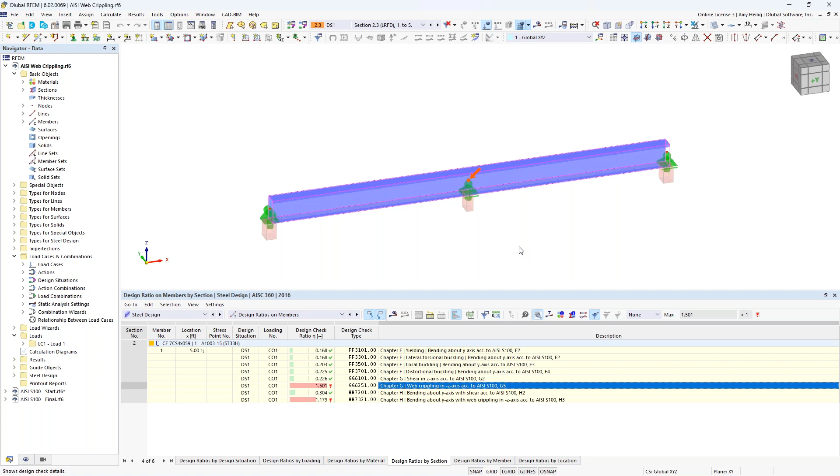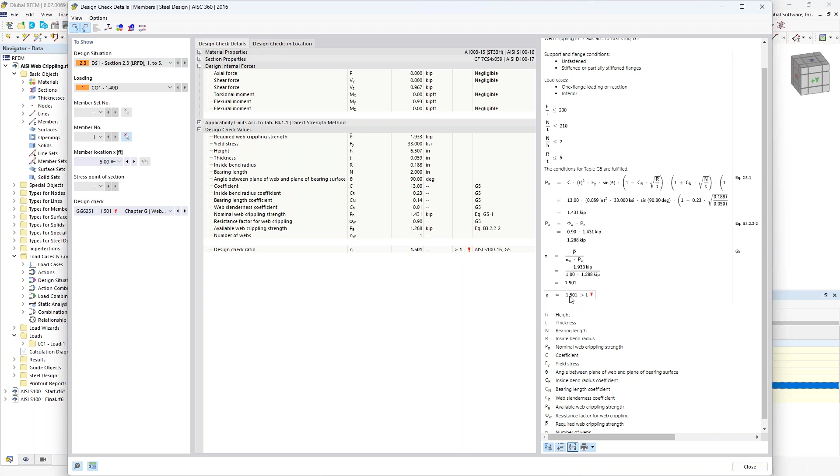We can pull open the design check details here, and we can see all of the information where we will reference those tables in G5. We list them out here in table format as well, and ultimately how we're calculating that design ratio for web crippling. So just an added benefit here of RFEM, again, that many FEA programs can't consider, but because we have those specific steel design supports, we can carry out this additional check.